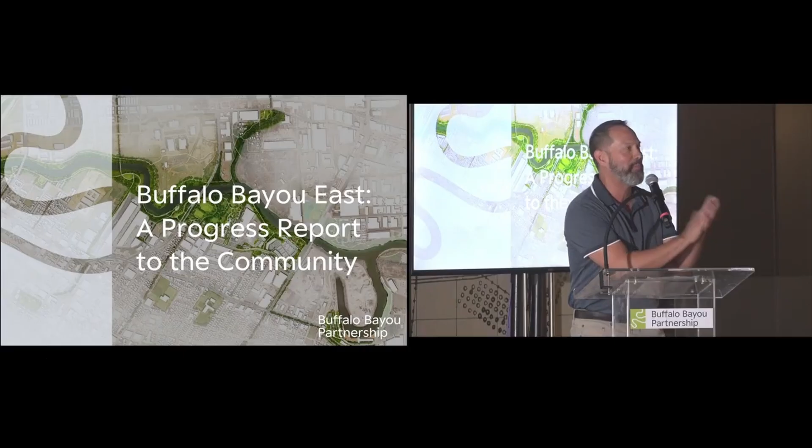Many of you know me as Bo, a nickname I've had since kindergarten. I just saw a friend here from my middle school days. It's great to be among so many fellow Houstonians, fellow East Enders, fellow Fifth Ward residents. Let's give all of us a round of applause. All right, Second Ward, Fifth Ward, East End, the city of Houston, we're here.

I'm a proud member of this organization, Buffalo Bayou Partnership, a longtime resident of the East End, and very proud and excited to be with all of you here this evening, just as what we're doing here for our community, for the city overall. And I want to recognize our board chair who's with us this evening, Judy Nyquist, just a little there behind the chairs.

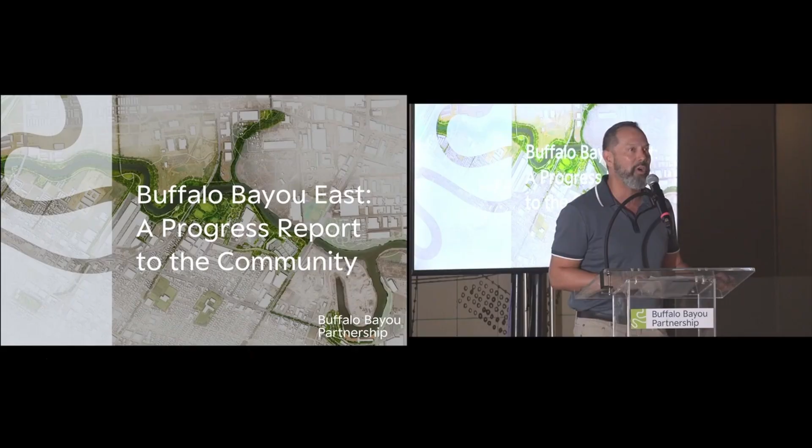Thank you, Judy. Fellow board members who are here, thank you for joining us in all the work to getting us to this point. I also want to recognize by name the president of our organization, Ann Olson, who unfortunately is under the weather, so she can't be here with us this evening. But she sends her regards, and she has just been a force of nature in getting us to the point where we are and looking ahead to the future.

Buffalo Bayou Partnership, BBP, is the nonprofit creating and stewarding welcoming parks, trails, and unique spaces, connecting Houstonians with one of our most historic and most prominent natural features, Buffalo Bayou. As brown as it is, we say, let's give Buffalo Bayou itself a round of applause. Don't we just love it?

We are delighted that you're with us here this evening to update you on the exciting work we are doing along the banks of Buffalo Bayou here in the East Sector. Some of you were with us in 2019 when we presented the master plan for the East Sector. We were here at this location. It looked quite different, but there was still that great excitement. Some of you were here going back to 2017, 2018 when we launched the master plan. Thank you for being here along the way.

Thank you for being with us this evening. The projects you will see presented here in a few minutes have been made possible through an extraordinary public-private partnership, and that needs to be recognized. It has involved the Kinder Foundation, the City of Houston, Harris County, Buffalo Bayou Partnership, the Tax Increment Reinvestment Zones for the East End and also for Fifth Ward, TIRZ 23 and TIRZ 18. We extend our heartfelt and utmost gratitude to all those partners for their support, and a special thanks to the Houston Parks and Recreation Department for its ongoing collaboration. Please, a round of applause for those partners, this public-private partnership that has made this all possible.

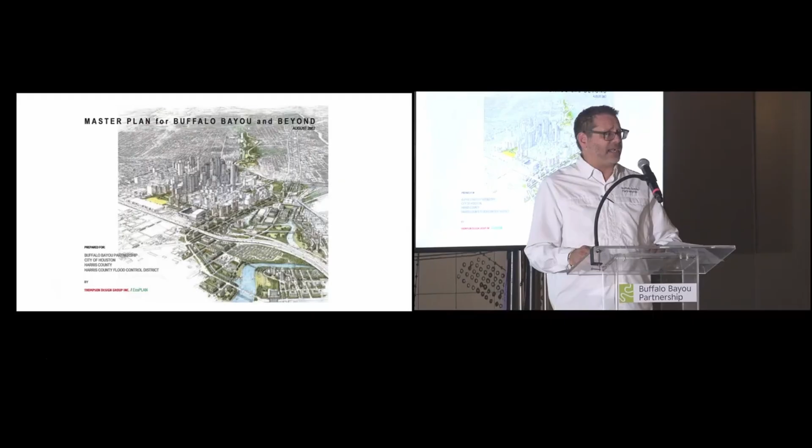In 2019, as Bo mentioned, we launched the Buffalo Bayou East Master Plan, and 3 years later, the Kinder Foundation stepped forward and awarded us a $100 million grant, which we leveraged with the city and the county, funding this over $300 million effort.

Tonight, we'll update you on the projects that have been completed and open to the public, projects under construction, and others that will be coming in the coming years. As our project managers and I make our presentations, we hope you will see the themes that are woven through these projects.

Building on what's already here is one of the things we have really strived and taken to heart. As you walk around this building, you'll see whether it's keeping the native trees and vegetation of these areas, repurposing abandoned industrial remnants, and creating new welcoming public spaces. It is very intentional that we are not wiping the slate clean, but building upon these existing resources.

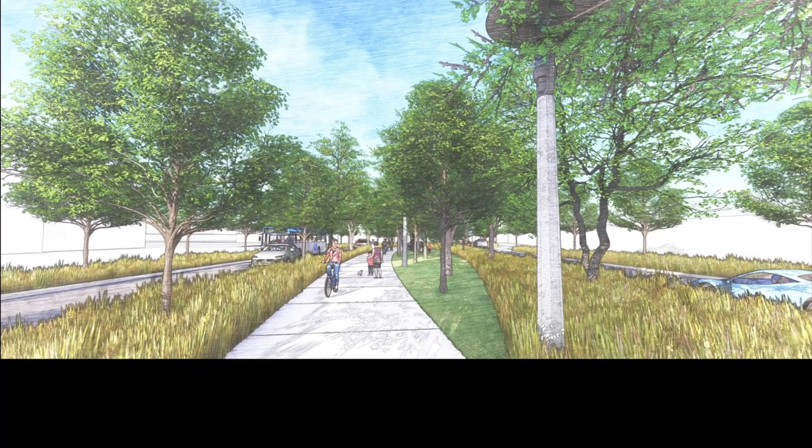By reimagining unique historic waterfronts and buildings like Turning Basin into vibrant new destinations, we weave the cultural heritage of maritime industrial history of the Great East End and Fifth Wards into these landscapes. Besides trails, we're developing pedestrian bridges, constructing neighborhood streets, and transforming Navigation Boulevard into a linear greenway in partnership with Harris County, as you can see here.

So now, I will dive into my part of the presentation.

We'll now share a high-level overview of the 10-year plan, reiterating the breadth and type of projects comprised here. This includes over 75 acres of new and renovated green space, 6 miles of trails, and nearly 2 miles of roadway and roadway improvements. There's over 20 projects we're working on or have completed, 80 mixed-use housing units, and over 100,000 square feet of building space. The extension of the hike and bike trails, this network from and to downtown, will connect neighborhoods to the bayou and each other, which have long lacked this connectivity. Finally, and most importantly to me, Buffalo Bayou will maintain these projects once we're finished, from then until in perpetuity.

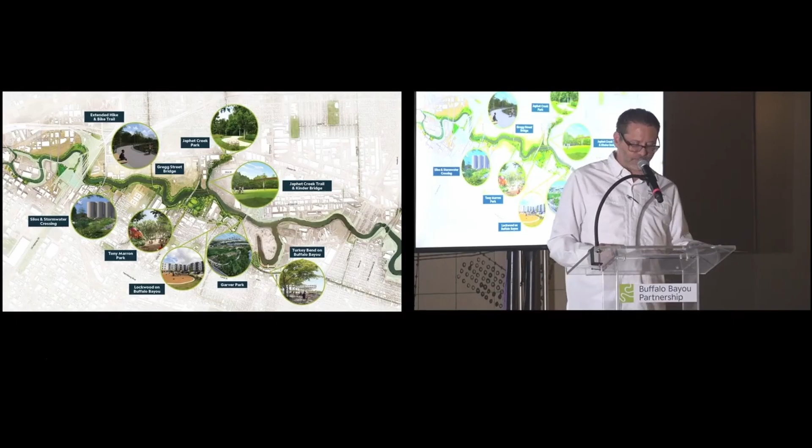It's always fun when you get to have the ribbon cutting and see the people, which we really do this for. I've learned a long time ago, we do this for the people. The projects are great, but it's really the people that enjoy these things that are the legacy we leave behind.

By the end of this year, the city, the county, and Buffalo Bayou in our partnership will have completed 8 of these projects that you'll see or have heard of. It includes the housing in Lockwood, Japhet Creek Park Phase 1, and Garver Park, and portions of new roadways that we're building called Barone Parkway and the city's Lockwood Capital Improvements Project. Our teams will dive much greater into detail in these presentations.

We've celebrated many groundbreakings, and again, it's great to have everybody involved in these, and these are what we look forward to in our day-to-day efforts. Just this year, we broke ground on Tony Marron Park, and literally today, the crews were out starting our South Bank Trail. Both of these will open in 2027.

Connectivity is the single most important and unifying component of all of our projects. These trails, bridges, and other shared use paths connect this network together into a living system. The Kinder Trails are comprised of trails on the north bank of Buffalo Bayou, from downtown to Tony Marron to Japhet Creek, and on the south bank from downtown to Tony Marron Park. This includes one of our 2 pedestrian bridges that will cross the bayou, connecting Gregg Street on the north and Velasco Street on the south.

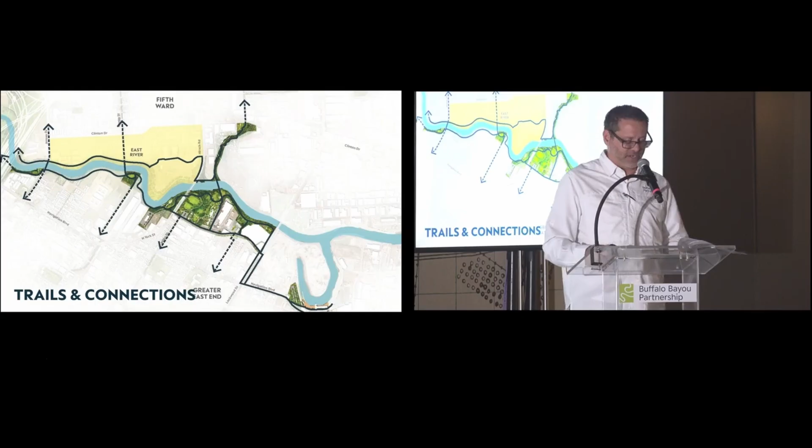We didn't get here overnight. Buffalo Bayou Partnership has been in existence since 1986, and nearly since day one, the partnership has been acquiring real estate in the East End, the single reason we're able to complete this vision. But all those years of acquisition, it still wasn't enough. The properties on the screen, which was no small task, are the properties we had to acquire either in fee, easement, or other sources to be able to deliver these projects.

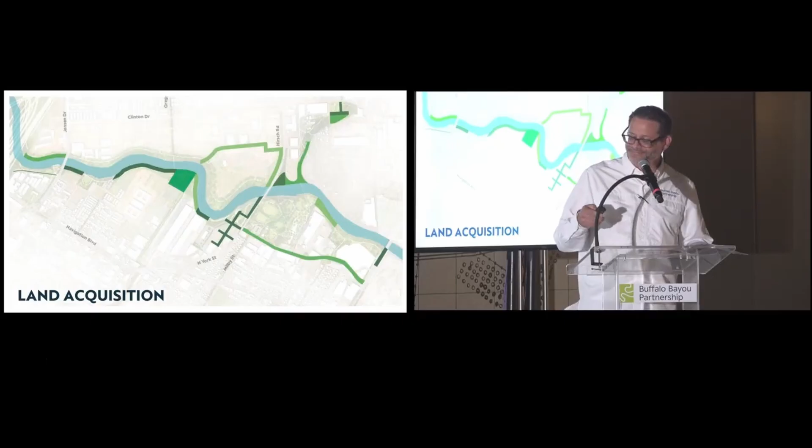The other thing is we believe in making sure we deliver equitably across all of our projects. BBP has created many standards, but we also learn from the past. Our trails used to be 10 feet in width; our trails in East End will be 13 to 15 feet wide. This allows for a greater number of users, as well as many of the other lessons learned.

Also key in our projects are amenities and the safety that they bring. Trails, as you know, Buffalo Bayou lights our trails dusk to dawn, as most lives don't revolve around daylight hours any longer, and these trails are used by people to get to work, school, and other events. We're also implementing call stations, where for the first time in a Houston park, we're piloting those to see how they work for safety.

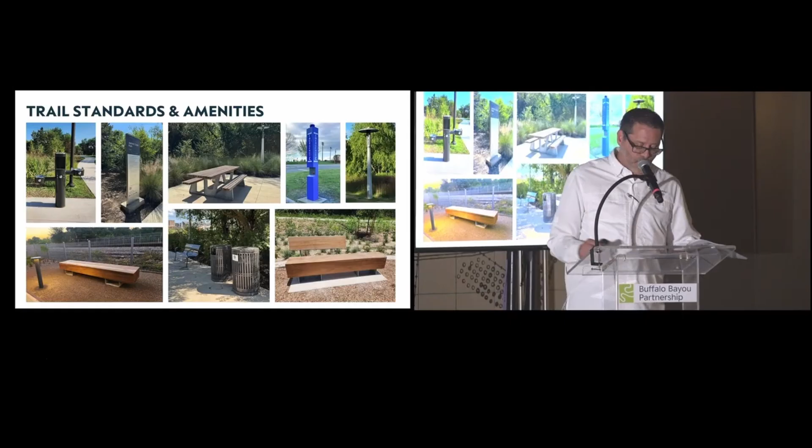As well as the other standard amenities, we recognize our benches and trash cans and things like that, but we're also implementing furniture and signage that are unique elements to the neighborhood and the community. We're emphasizing more natural designs that tie better to the aesthetics of the project, as you can see in some of the wood furniture.

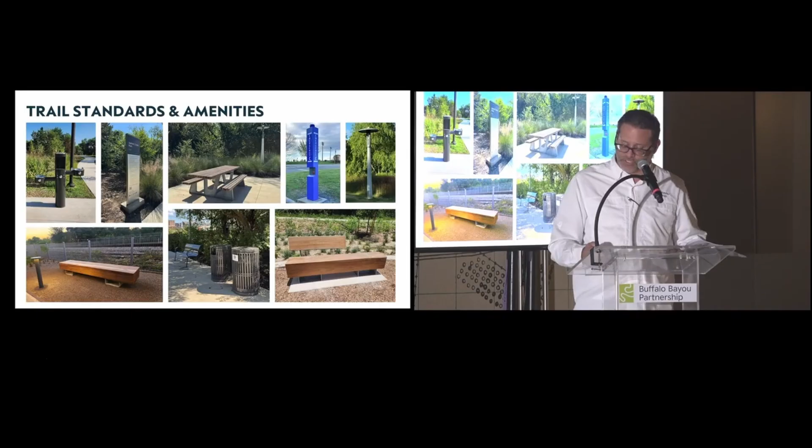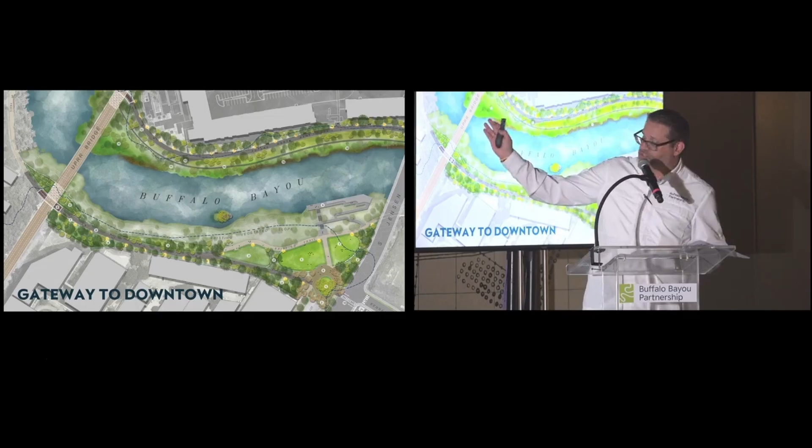The first project I'll go over is our gateways to downtown. It's both the north and south banks of the bayou. On this specific segment, one of the key components is the connection to Jensen, north and south. It's one of the only links between the two communities into downtown, which has long lost the connection on the north bank.

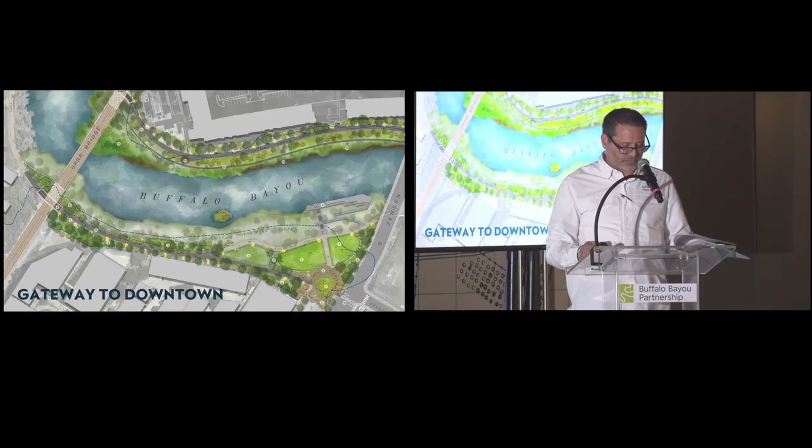Each project comes with its own unique set of challenges. The North Bank's design required a heavily engineered solution to bolster the banks, furthered by the self-supported trail, driven by the obligations to maintain the bayou's capacity, which includes stabilization of upwards of 20 feet of fill material. I'll show you in a second.

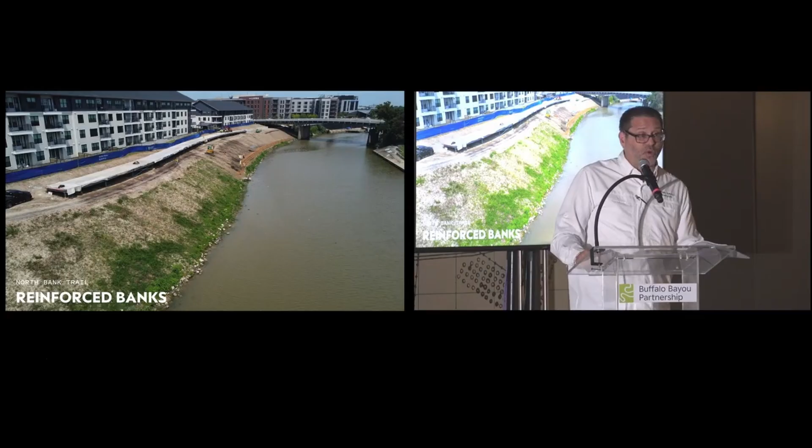As you can see, the massive amounts of fill here ensure the stabilization of this bank long into the future. On the right, you'll see the landscaping beginning to go in with a very unique vegetation system that matures over time into a very lush and dense vegetative bank, as you can see here from Buffalo Bayou Park. This is great for the stability of the banks, and it also creates shade and natural habitats for a lot of the things that live here.

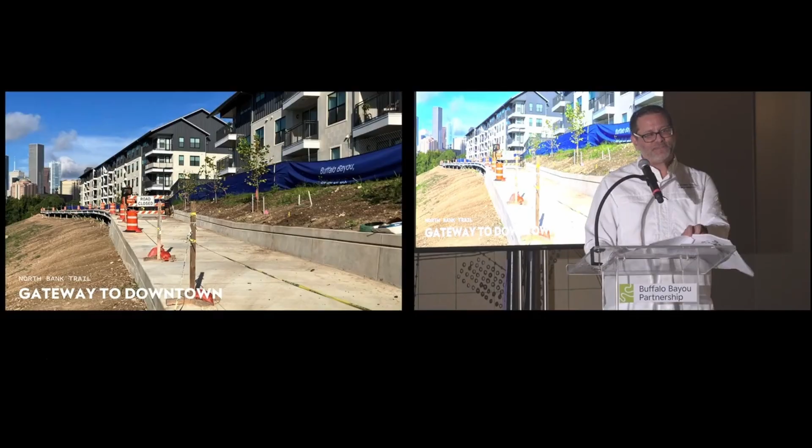That came out wrong, sorry. I just meant to say natural habitat. I know what you guys are thinking.

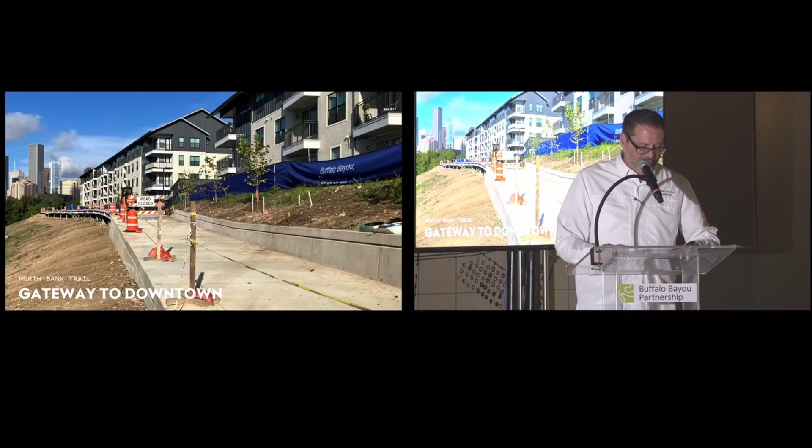These trails are really important. They connect downtown and move east to projects all the way to Japhet Creek on the north bank, and they include trails that have already been implemented. Our trails have been implemented on East River by Midway through their project.

Moving to the south side of the bayou, we're reimagining the iconic silos that many of you know and have seen and heard before. Many of you know these spaces or have visited them before. If not, we're confident you will in the future, for events or just as a rest along your bayou walk.

We're creating a site where the silos are and creating a stormwater crossing. Places like these will create new pocket parks and new green spaces along the trails. These green spaces have dual purposes—not only a neighborhood park and a place for events, but also a system to channel neighborhood rainwater and stormwater, flowing it through these spaces to create new lush habitats, as well as treating storm runoff before it goes back into the bayou.

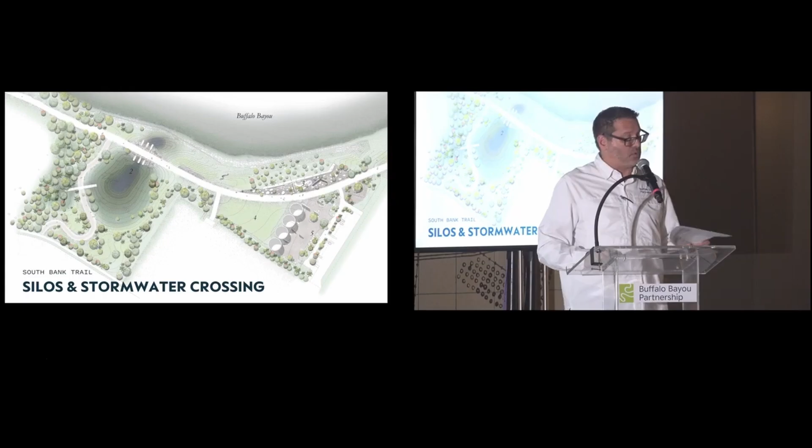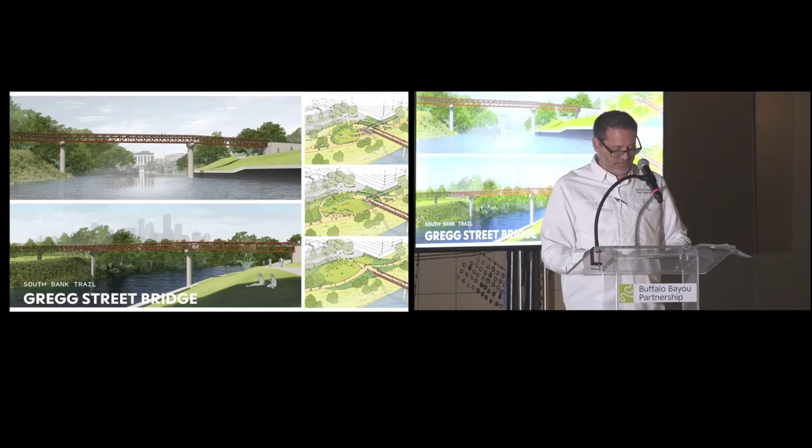As we continue east along the South Bank trails, we arrive at Velasco Street, which will connect to the Gregg Street Bridge across the bayou. This project is still in design, as you can see from some of the graphics on the right side of the screen showing that it's moving, but it will be one of the first projects we complete.

The importance of this trail and these connections, especially across the bayou, is that it not only connects the trails to each side of the bayou, but it connects the amenities and opportunities such as jobs, housing, and parks provided by both sides.

These trail segments and connections will provide something different to the many users of these facilities. We work with what we have, creating beautiful landscapes and structures responding to challenging environments on the banks of the bayou. Many require unique solutions, such as this elevated trail in the image, and such as the Kinder Bridge at Japhet Creek, which my colleague Waldemar Gonzalez will now share with you.

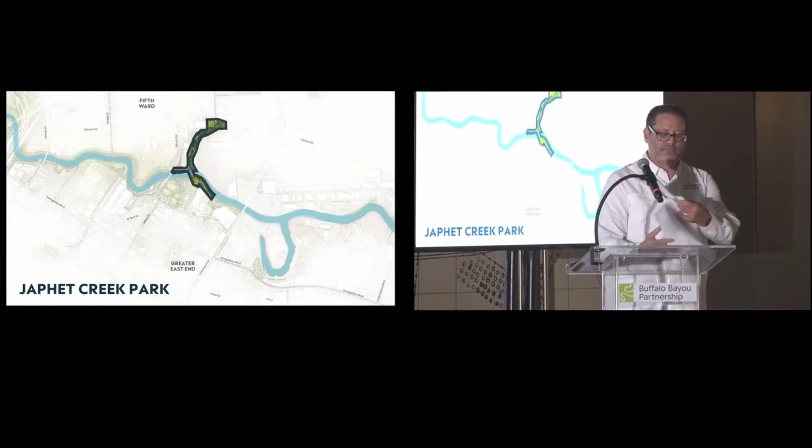I'm Waldemar Gonzalez, project manager with Buffalo Bayou Partnership. I'll be speaking to you about one of the first park projects that we've completed on the east side—that's Japhet Creek Park.

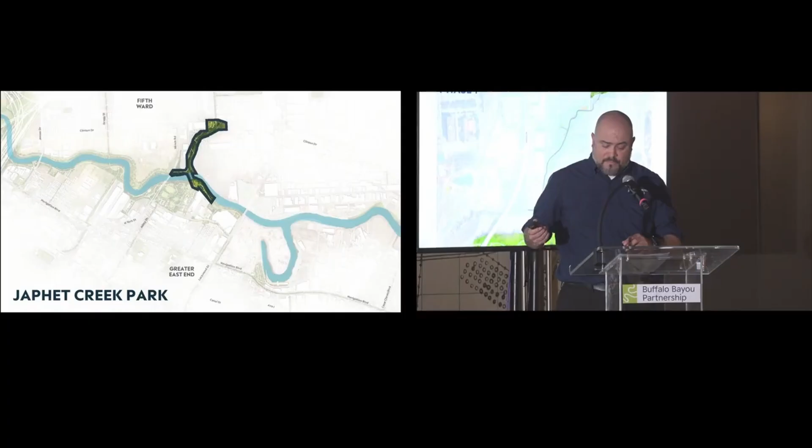It's a park that's been open for just over a year now. It is a 3-acre park that was originally created and maintained by the neighborhood. Shout out to Jim and Eileen, who are in the audience.

And I think it's a good example of our overall strategy, like Ian mentioned, of taking what's there, taking what works, and building upon it rather than scraping it clean and starting over.

Japhet Creek itself, this is very sensitive. Japhet Creek itself is one of the foremost assets of the park. It's a natural resource that a lot of people don't even know about. Aside from its importance as drainage for a good portion of the Fifth Ward, it's also one of the last spring-fed creeks that feeds Buffalo Bayou that has not been paved over.

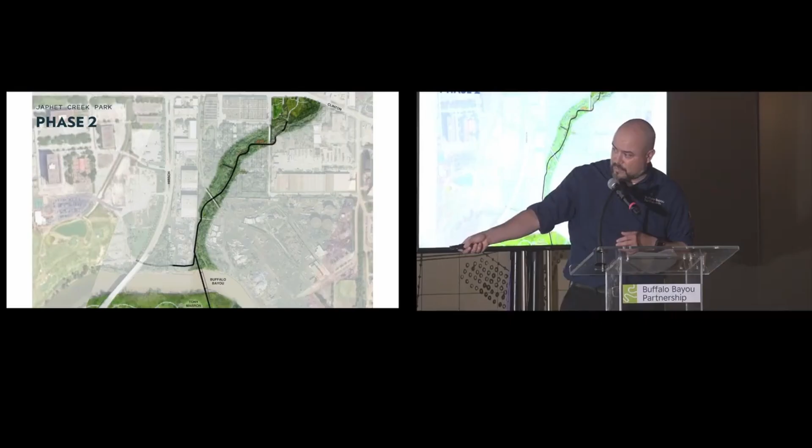In this way, the park serves as a gateway from the Fifth Ward into the expanded 40 acres at Tony Marron Park.

And of course, the end is at Tony Marron Park. The end goal is Tony Marron Park, and the last leg of that journey, the last 600 feet, is made possible by the Kinder Bridge. It's a pedestrian-only bridge, the second of the pedestrian bridges we're building on the east side. The first one was the Gregg Street Bridge that Ian alluded to earlier.

This links the second and fifth wards together while providing increased access primarily from the Fifth Ward down into the expanded park at Tony Marron, that my colleague Jose is going to tell us about.

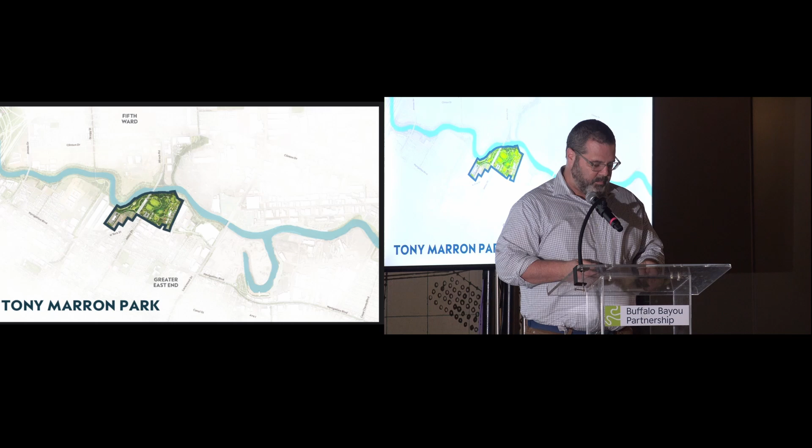Hi, I'm Jose Solis. I'm one of the other project managers for Buffalo Bayou Partnership. I'm going to talk about Tony Marron Park, which we really see as the green space heart of the entire Buffalo Bayou East 10-year plan.

It's currently under construction, but it's an existing park that's been there for many years in the East End, and we had several goals with this project. One was really to reconnect the neighborhood to the bayou. For many years, the neighborhood really didn't have access to the bayou, so one of the key goals is to make that connection. And the second is part of one of the general themes we've talked about all evening: build upon what's there.

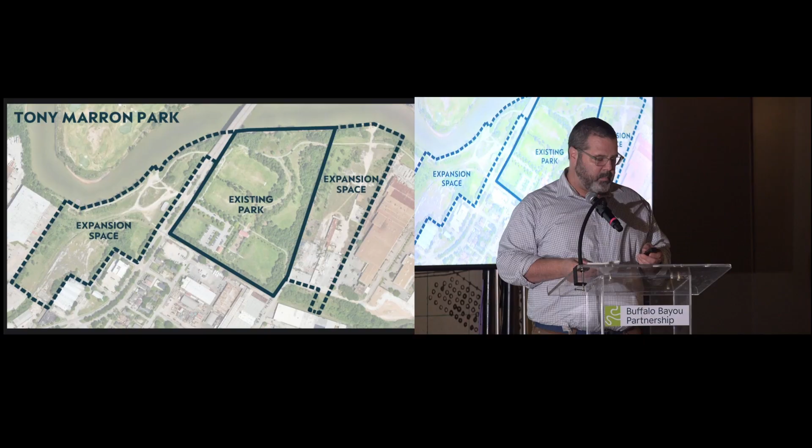So the existing park, you can see the footprint of what it had been before we started construction, was about 19 acres, and we're expanding it both to the east and to the west to make it a bit over 40 acres. We're really building upon what was in the park originally.

So there was an existing tree canopy, so we're keeping those. There were sports fields, existing structures. We even set it up so the new trails within the park follow the existing trails, so we don't have to disrupt the landscape as much. But on top of that, we're also really building upon the cultural and industrial legacies of the East End and Greater Fifth Ward.

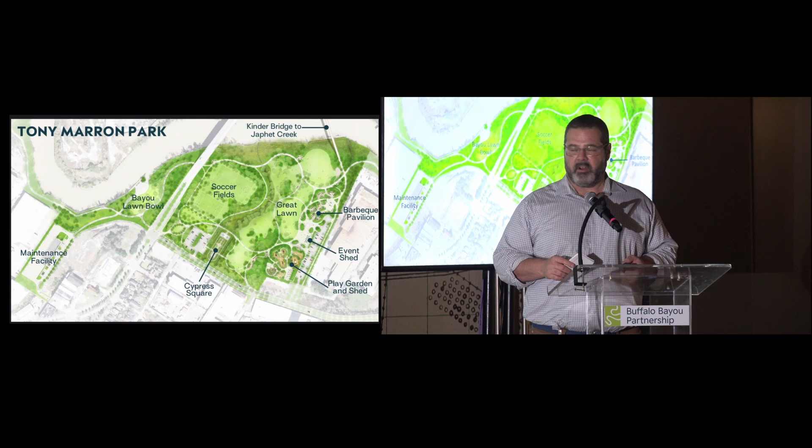This shows you the different types of spaces we're having within the park. As I mentioned, there's things like the soccer fields where those are existing and we're maintaining them. Others, like Cypress Square at the bottom, is an existing space we're adapting for a new use. And then things like the barbecue pavilion, event shed, and play garden are entirely new spaces being added to the park.

With Cypress Square, this is an existing grove of cypress trees, and we're modeling this as a formal garden, really modeling it after plazas you'd see in Latin American countries, in central plazas of major cities, to build upon the cultural legacy of the Second Ward as really the heart of the Mexican American community.

The next area is the overall area we're calling the play garden. It's not like a typical playground where you just have a bunch of equipment in a field. It's really a full landscape that envelops the kids—an immersive environment, and we really saw it that way from a creative standpoint.

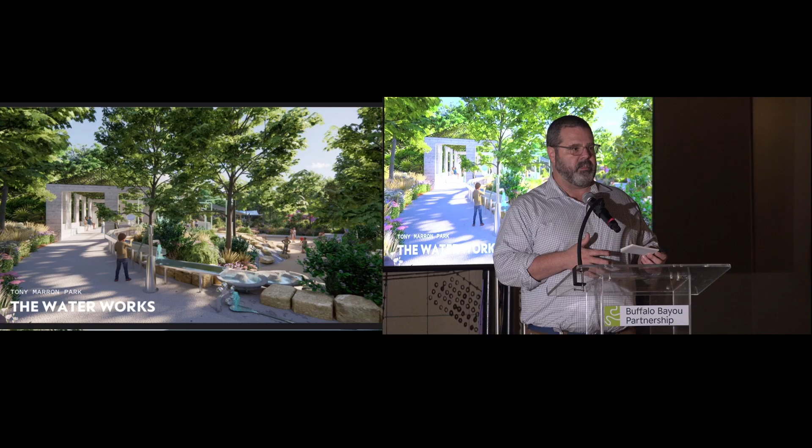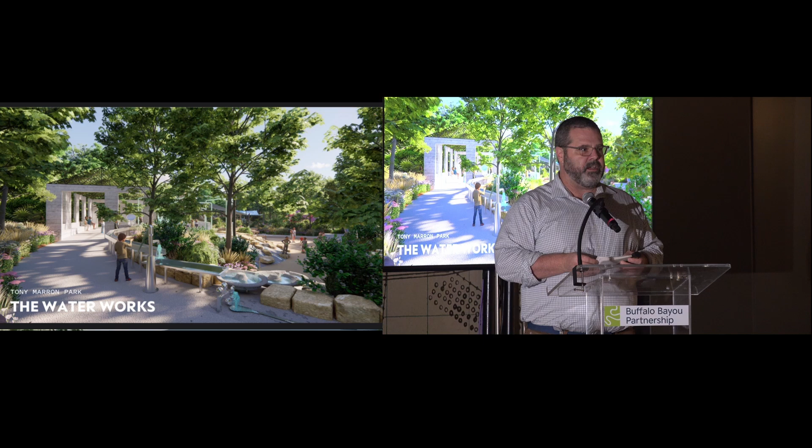There's also another area called the Waterworks. This is a water play landscape, and once again it builds upon the industrial legacy of Buffalo Bayou East. We have a waterworks structure at the top, as you can see in the upper left. The landscape is set up so that kids can manipulate the water, making it flow through all the different channels and structures, and they can pump things and do things like that—so it's a much more interactive experience than just a splash pad.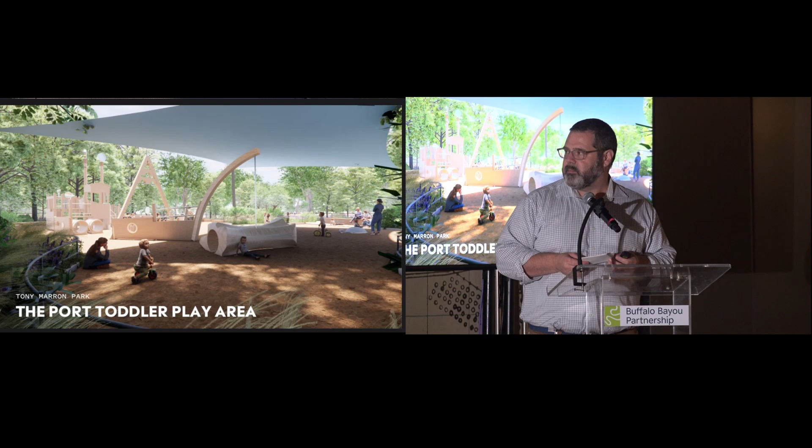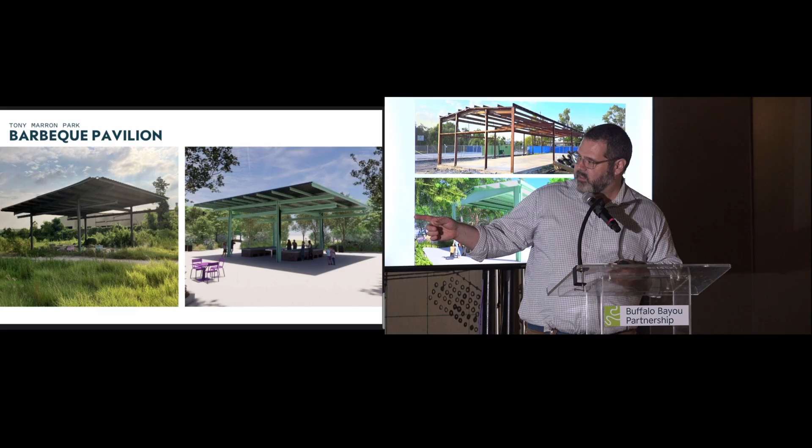We're also reusing an existing structure. This had been a warehouse in that expansion part of the park, and we're repurposing it as a park pavilion. This is where you can have kids' events, birthdays, things like that in a covered space, and importantly it'll have restrooms, also with facilities for cleaning kids after they've been playing in the water play area.

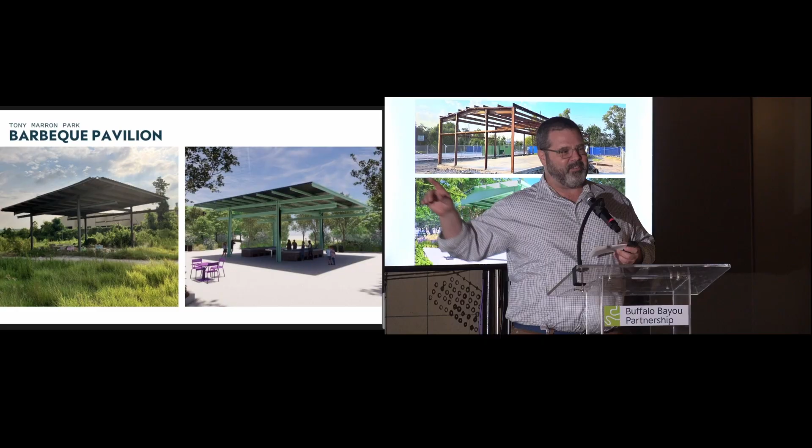The next structure on the site is an existing structure being repurposed as the barbecue pavilion. It'll have two very large communal barbecue pits that I actually saw John and Veronica Avila from Henderson and Kane—she's a board member and has literally been helping us design these pits—modeled after what you might see in Central Texas at dance halls and churches, where there are big community events. We'll be able to host big events here in this space.

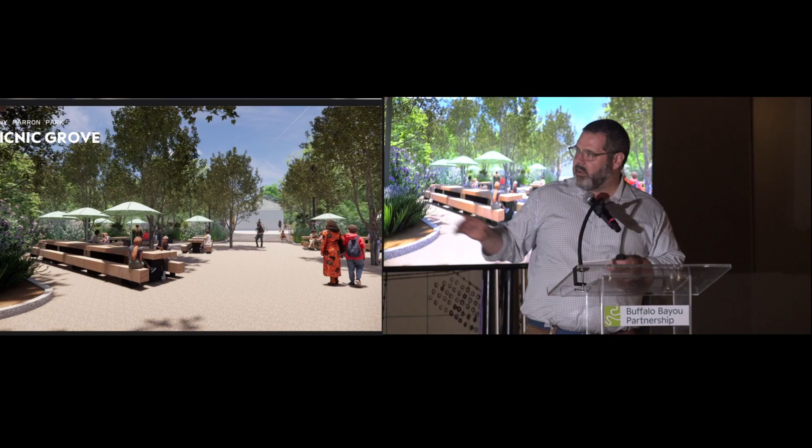Surrounding that pavilion will be multiple picnic tables, chairs, and tables, but there'll also be a whole series of barbecue grills where families and friends can congregate around food.

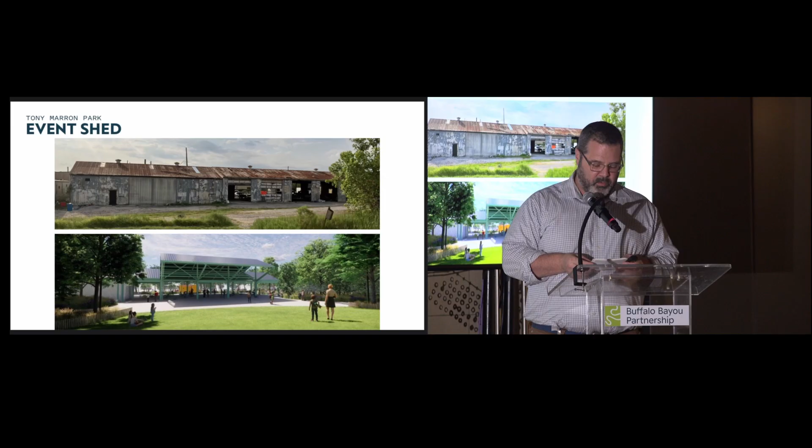Another structure being repurposed on the site is this old warehouse at the top, which will be converted into what we're calling the event shed. This will be a covered pavilion hosting events like movie nights, pop-up markets, concerts, and things like that, but it'll also be the spot in the park where families and friends can gather in the shade.

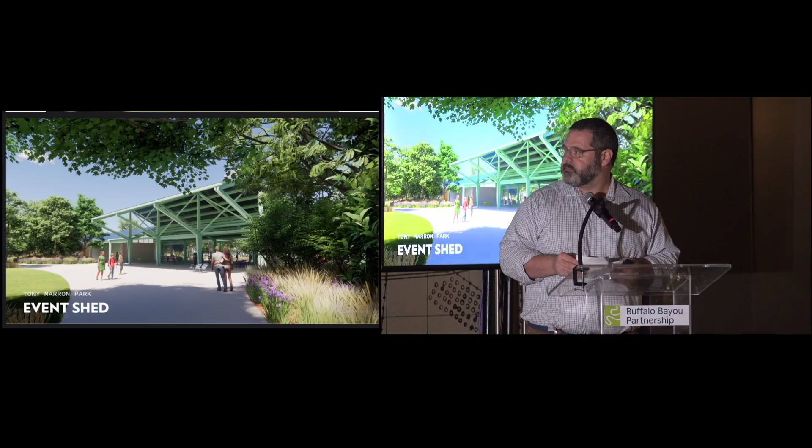Underneath the Hirsch Bridge, to take advantage of the shade there, we're putting a fitness area that'll also be along the main trail along the bayou, so that as people are exercising and using the trail for fitness, there's a direct area they can add on to their workout.

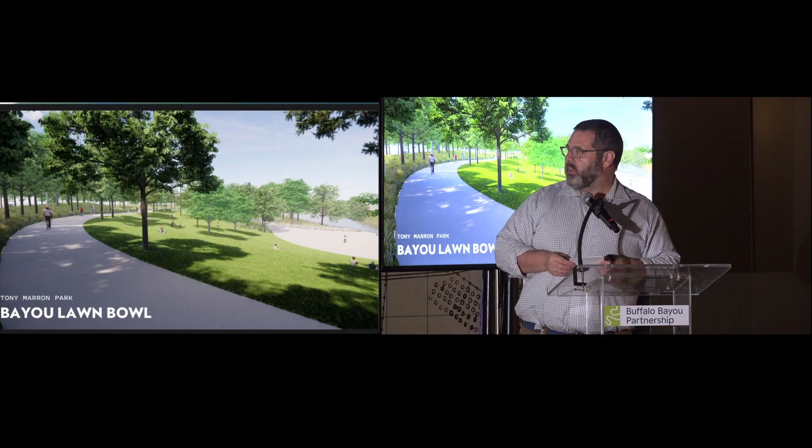And then just east of that, also along the Bayou Trail, there's a large Bayou lawn bowl that faces the water, so people in the park can have a visual connection down to the water. It's also designed, as you can see in the rendering, to be undulating, sort of like an amphitheater, so we'll be able to do outdoor performances and events in this location.

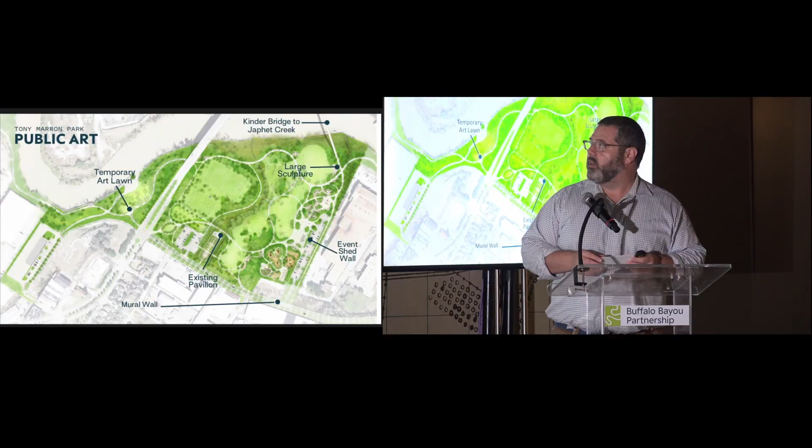Tony Marron Park is also going to be the site of a lot of the public art that we're implementing throughout Buffalo Bayou East. You can see there are several locations scattered throughout the park. Four of the locations are permanent pieces. The temporary art lawn, right next to the lawn bowl we just looked at, will be a space for rotating exhibits, similar to installations we've done at Buffalo Bayou Park. For the rest of the pieces, three are tied to existing structures out here, and the fourth is a much larger freestanding structure.

That freestanding structure comes from an artist we've commissioned named Margarita Cabrera. She's an El Paso-born artist with deep Texas ties, and has lived in Houston at various points in her career. She's already started working on this piece. This summer we held a workshop with her where community members interacted with her and started creating some of the components that will be incorporated into the artwork, so the piece will literally be coming from the community.

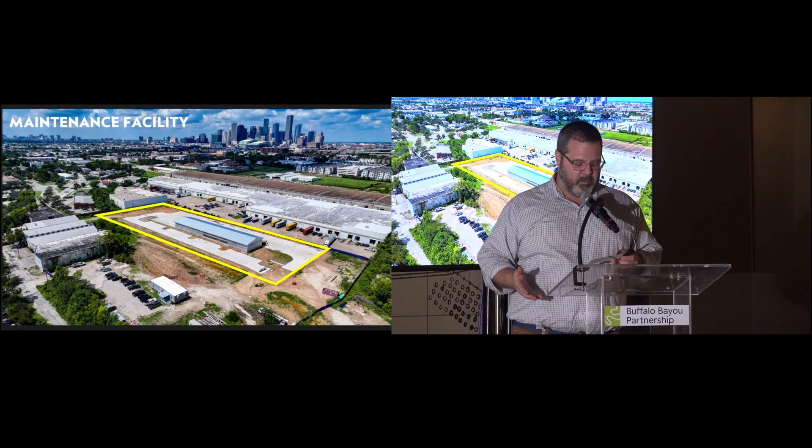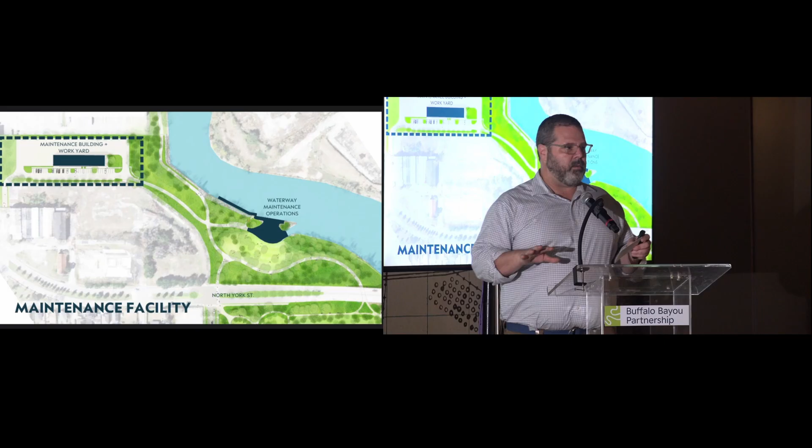Another key piece of Buffalo Bayou East at the far end of Tony Marron Park is the maintenance facility. It's key to ensuring the future of all these spaces, supporting our long-term investments so these spaces stay clean and safe. Both park maintenance operations and bayou operations will be housed in this facility. It's located away from public areas in the park, so it's out of the way, but it still has access to the water in a way that maintenance vehicles won't intrude into the park, minimizing interaction between the public and maintenance crews.

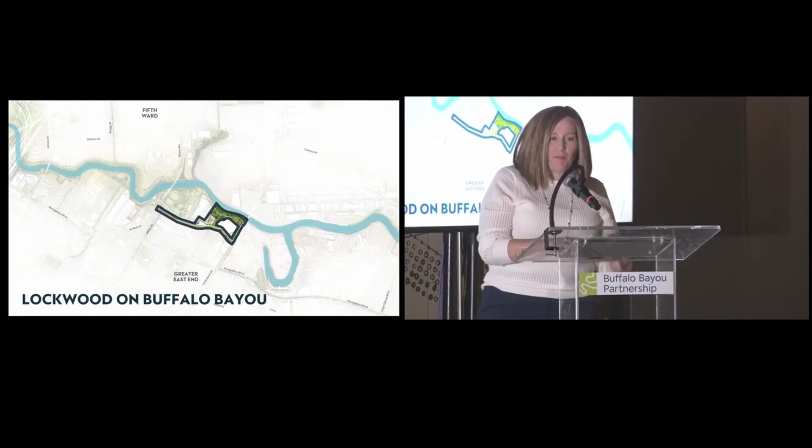Good evening, I am Leslie Ironman, a Buffalo Bayou Partnership project manager for portions of Lockwood on Buffalo Bayou and various other projects. Lockwood on Buffalo Bayou is situated on Buffalo Bayou just east of Tony Marron Park, and includes affordable housing, a neighborhood park, and a new roadway.

The first phase of this project was the Lockwood on Buffalo Bayou multi-unit community, completed in 2024. This affordable housing offers 80 one-, two-, and three-bedroom homes to residents with varied income ranges, featuring spacious floor plans, abundant natural light, modern conveniences, and unique touches by local artists. These apartments were thoughtfully designed to elevate residents' quality of life, offering stunning views of the downtown skyline, Buffalo Bayou, and the soon-to-be-opened Garver Park. Lockwood on Buffalo Bayou helps frame the 10-acre Garver Park, creating an important boundary for the recreational green space to be enjoyed by area residents.

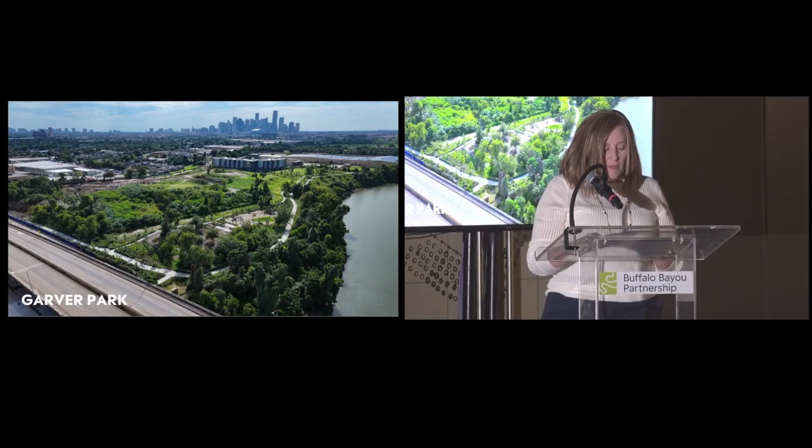Just over a year ago, right as construction began, the Garver Park space endured a double blow: the May 2024 derecho, followed by Hurricane Beryl just two months later. Our design team and general contractor worked very hard to assess the impact, save trees, and adjust landscaping plans as needed. Today, I'm thrilled to share that we're putting the finishing touches on what will soon be a vibrant, welcoming green space for the community this spring.

This park was designed with intention. With Lockwood on Buffalo Bayou as an anchor, our goal was to create a community embedded within lush public green space that acts as a front yard, basically a shared space for residents in the adjacent neighborhood community. Trails now weave through the existing landscape, where we preserved as much of the natural environment as possible.

One of the elements we are proud of is our commitment to using native planting and grasses. Our goal is to support local ecosystems by offering food and habitat for wildlife, as well as to provide a low-maintenance green space that requires less water, fertilizer, and pesticides. These native plants will also help control soil erosion and improve water quality by reducing runoff.

An important highlight for this park and for Buffalo Bayou East is the new dog park. Nestled in a more natural setting and divided with plenty of space for small and large breeds, it's just one of the many amenities that reflect our commitment to accessibility, sustainability, and our four-legged friends.

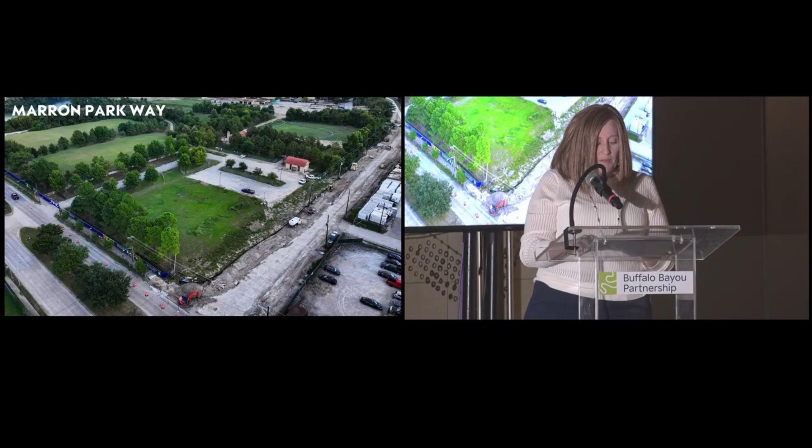This new complete street includes infrastructure improvements that are part of our 10-year plan to expand public access, increase safety, and improve the quality of life for our community.

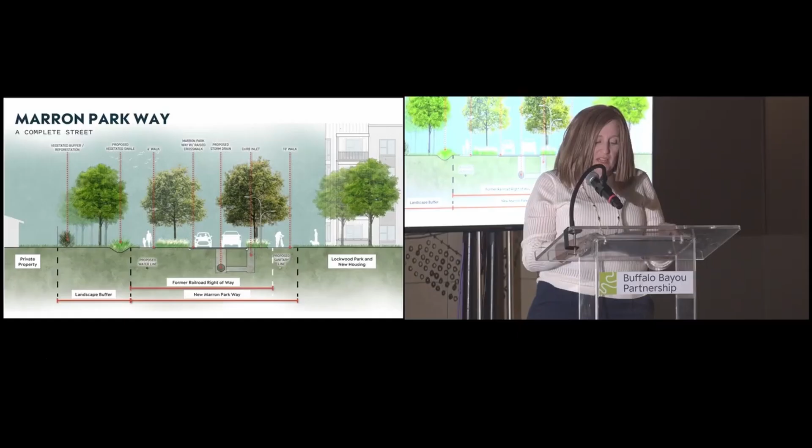A 10-foot wide hike and bike trail is an extension of the Bayou Trail Network and will provide direct access to green space for all of our neighbors.

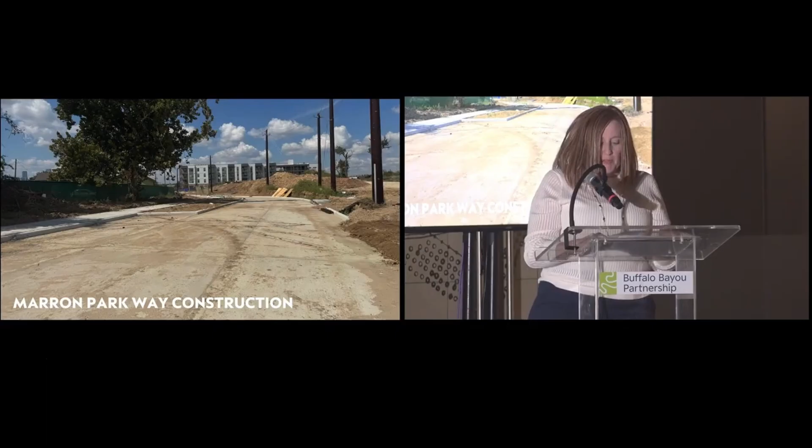This street is intended to alleviate truck and through traffic within the adjacent neighborhoods. I know everyone's looking forward to that. We anticipate this project to be complete and open to the public in the coming spring of '26.

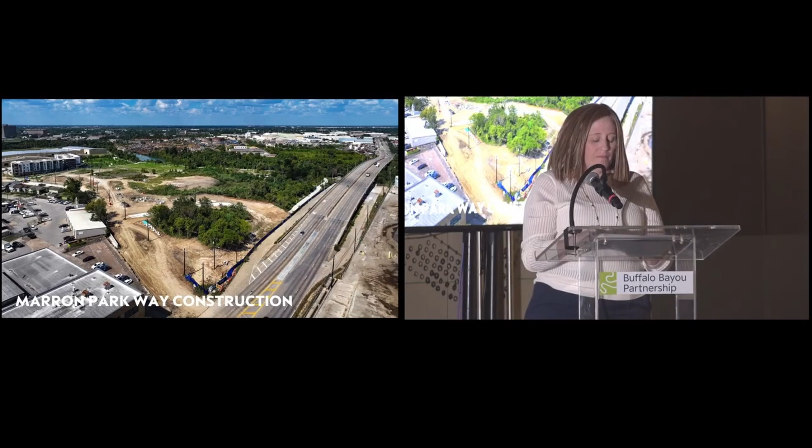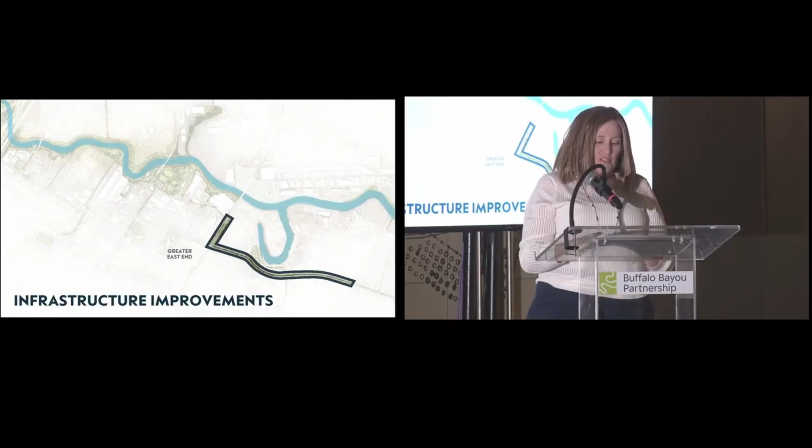In addition to Marron Parkway, we are collaborating with the city and county on significant infrastructural improvements to increase multimodal transportation on adjacent streets. The Lockwood Capital Improvement Project with the City of Houston connects directly to Marron Parkway and Garber Park. This is the first phase of the multi-phase project, which has been completed and includes widened and accessible sidewalks and crosswalks, as well as new trees and vegetation along Lockwood Drive, just north of Navigation Boulevard.

Navigation Greenway is a scenic linear park that BBP is creating in collaboration with Harris County Precinct 2. Currently, the design is complete and it's set to go into construction next year.

Stretching along Navigation Boulevard from Lockwood Drive, the Greenway is a scenic linear park with a wide tree-lined median and a hike and bike trail that will link several green spaces together, including Garber Park and Turkey Bend.

Eventually, the Greenway will also provide a beautiful alternative path for those ultimately heading toward the Port of Houston turning basin. The improved Navigation Greenway will provide safe pedestrian and cycling accessibility to community resources along Navigation Boulevard.

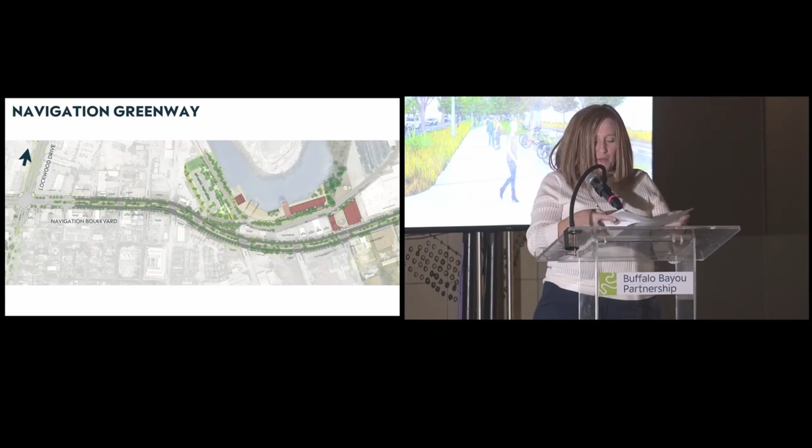The last project we're going to talk about tonight is made up of several different pieces and several different phases. The Turkey Bend site is really strategic for us because it's one of the few places really anywhere in Houston where we have a major east-west connector and the bayou basically touching each other.

What our design team started off with—I know our architect is represented here tonight, Harry, shout out—was a really simple red brick facade, a lot of concrete, loading dock, truck bays, that sort of thing. Very closed off. There's nothing there that says this is a public space.

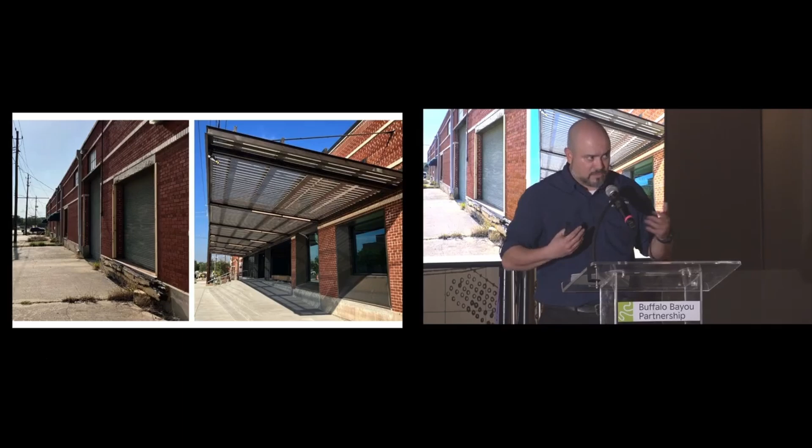Our architects came up with the concept of opening the facade physically and symbolically to the neighborhood, to make it clear that yes, you are welcome here, please come inside. The north side has similar treatment. This provides views to the bayou during the daytime, nice views of downtown, and right now you can see the night skyline. It's also a quiet place to come have lunch, read a book, and escape the hustle and bustle of Navigation Boulevard.

If you've wandered around the building, it's pretty clear this is not a typical historic renovation. While we want to honor the history of the spaces we're working in and preserve the existing character and fabric of the building, we also give our design teams a fair amount of freedom to reimagine the space to suit a new purpose. I think you're seeing the end result of that here.

Part of bringing the building up to code meant that a lot of the existing graffiti the building was known for got covered up. But we had this idea that as we demoed the walls to create these large welcoming openings, we could salvage the bricks with the graffiti paint on them and use them in the wall that masks the restroom in the background here.

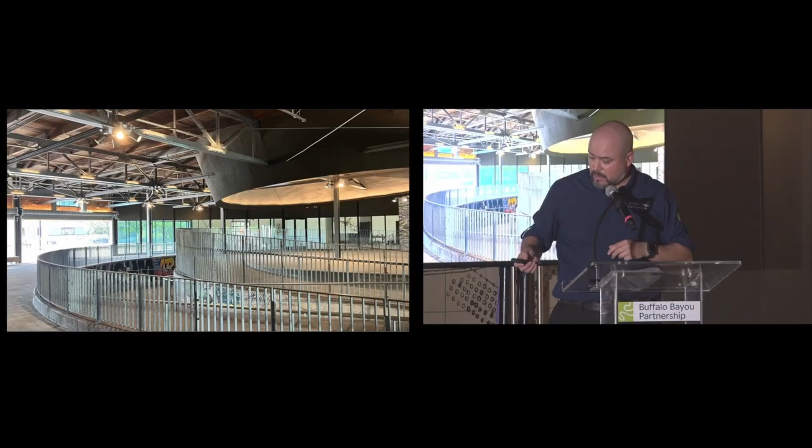So we're in a public plaza. This is public space. We are in Houston though, so having a roof for shade is a great idea, and having giant fans is an even better idea. By the way, even though the building is not fully open yet to the public, it is available for event rentals, so feel free to reach out to us.

The breezeway is the front door to all of the spaces on the periphery. We've got two lease spaces on the west side here, but more importantly, Houston Public Library is working on putting in the Hispanic History Research Center and Archive to my left over here.

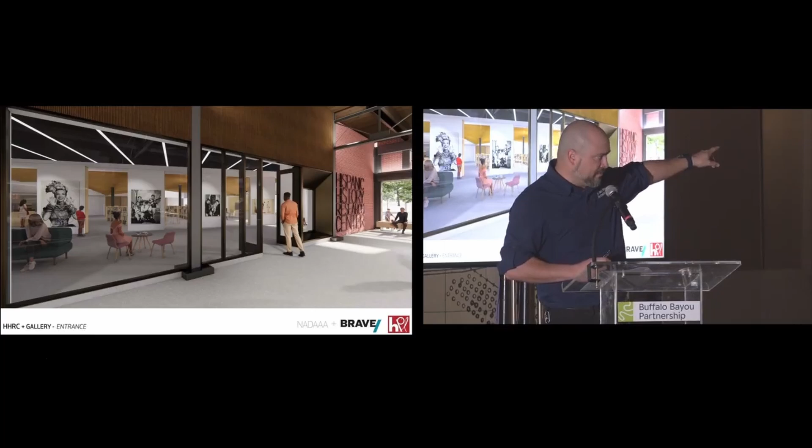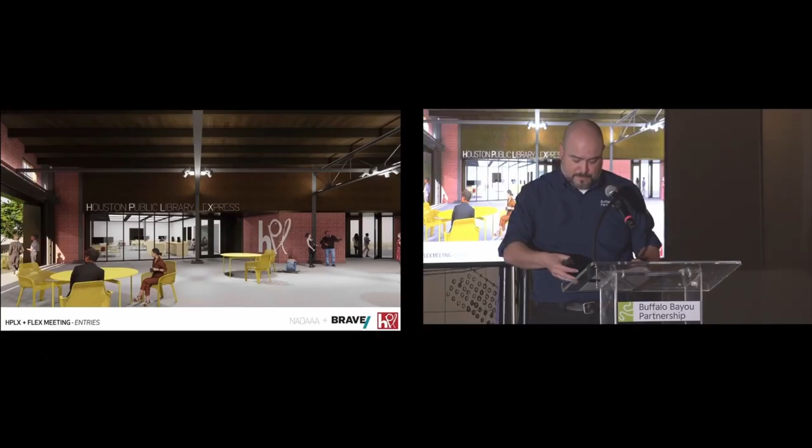I know we have some representatives from the Houston Public Library here tonight—feel free to stand up, wave. Behind me, we will have a Houston Public Library Express branch in this space here, and both of these should be open within the next couple of years.

Many of you have been here before for events like the Graffiti Symposium, or for the launch of the master plan, so you know this cool tunnel. For those who haven't been here before, a key feature of the space, and really what made this of interest to Buffalo Bayou, is this connection down to the bayou.

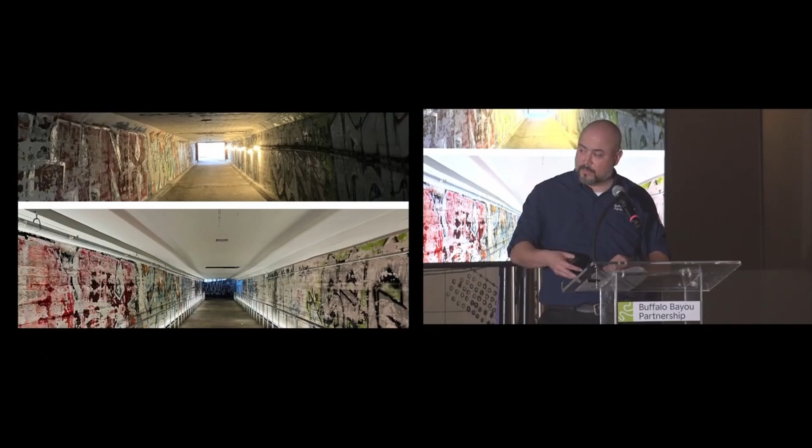This is the original tunnel. To me, it's one of the coolest spaces in the building, and soon it will be open to the public for everyone to enjoy, providing a direct connection from Navigation down to the bayou and what will be the next phase of our project on Buffalo Bayou. Now, this is still in design.

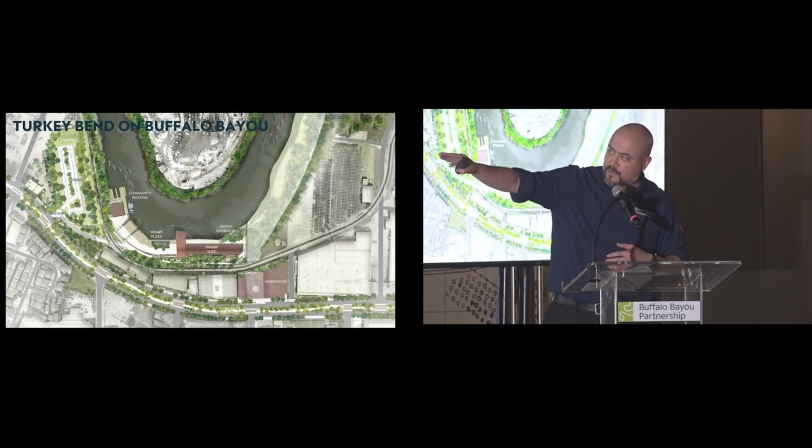The next phase is the creation of a waterfront park at what is the historic Houston Barge Terminal at Turkey Bend. There's roughly 12 acres of space down here. We have a 20,000 square foot warehouse and two gantry cranes, one of them with this great roof structure over it. We're creating a community boating hub on the west end of it, and parking also directly off of Navigation.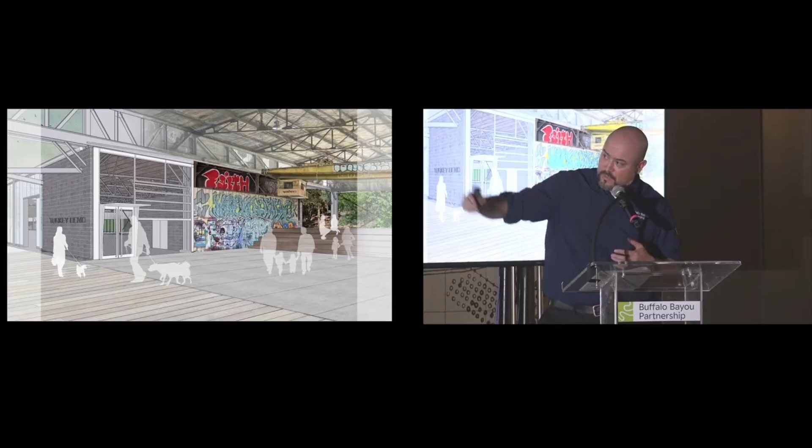Similar to our other projects, we intend to honor the history, keep as much of the character and fabric as we can of the existing building. I mean, come on, you cannot build something like this now, right? It's beautiful, and we're going to take that, and as you can see in this next image here,

it's reinterpreted as a public gathering space, performance space, and entry into the wharf pavilion beyond. The area behind the wharf shed is an old rail spur - those railroad tracks used to bring rail cars here to load and unload from the wharf shed. It's an area that has, by itself, serendipitously become a rain garden of sorts. We're working with our design teams to figure out how to keep that and possibly even use it to treat stormwater runoff before it makes its way into the bayou.

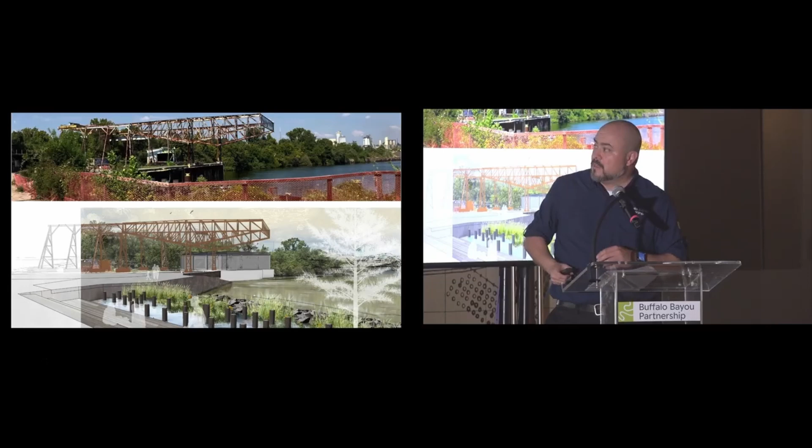The historic wharf will become a waterfront park with nods to the history that was here. So we see the old piles here that are supporting the wood wharf deck, the original wharf deck, and we see the original gantry crane in the background here.

One of the great things about Turkey Bend as a whole, if you all remember the map from a couple slides ago, that U-shape is completely out of the main channel of the bayou, so there's no current and no boat traffic. Because of that, we'll encourage and really focus our boating activities here. You can imagine coming here and renting a canoe or kayak, or driving down the driveway, taking the ramp down under the gantry, and launching your kayak directly into the water there.

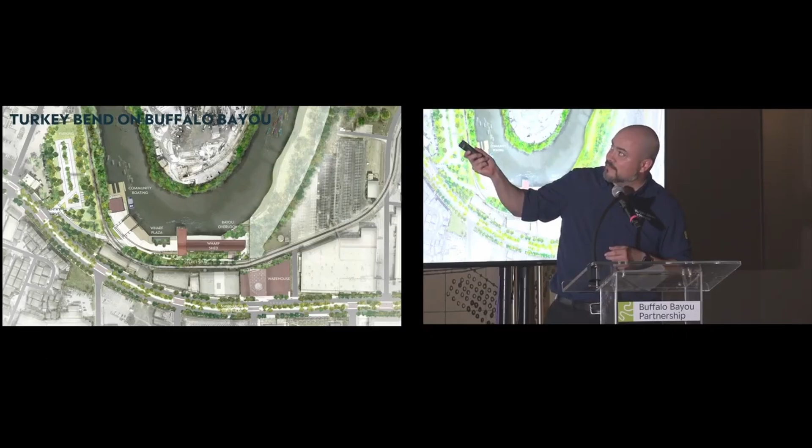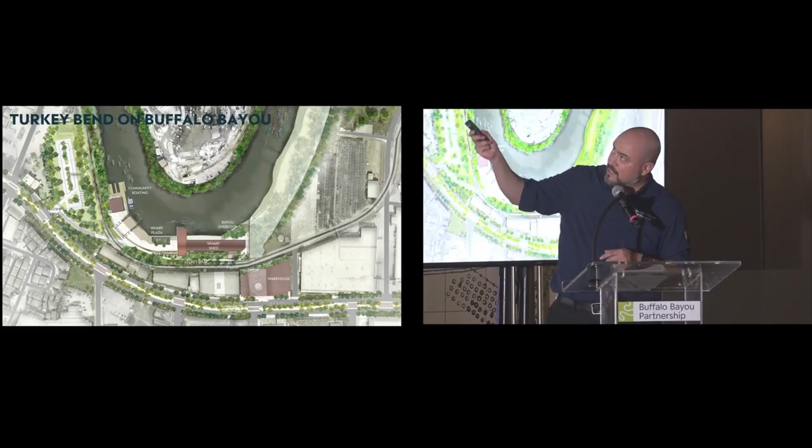Now, this is beyond the 10-year plan, but we've got almost 5 acres of property on the east bank here, and the goal is to develop that into additional park and trail space, and then possibly even link up to property that we have on the north bank with another pedestrian bridge.

That's it for Turkey Bend. With that, I'm going to turn this over to Ian to close us out.

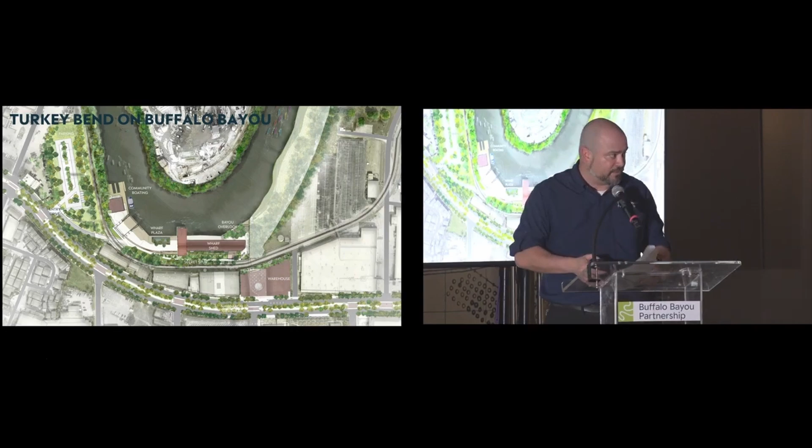With all that, you can see why I've been doing this for over 20 years, working with the partnership. Having such a great team and working for such a great organization, but most importantly, thank you. Thank all of you who are here. You're the reason we do this work. This is for you, your family, and the future of Houston.

We appreciate all of you joining us for this journey to help us realize these connected networks of parks, trails, and unique destinations along Buffalo Bayou East. While we've made significant progress today with design, some construction, some completion of these projects, we still have much to do since 2022. While all these projects of the master plan will be completed by 2032, we will see many openings together, sharing a lot of groundbreakings, and gather in a lot of new community spaces as we bring these projects to fruition.